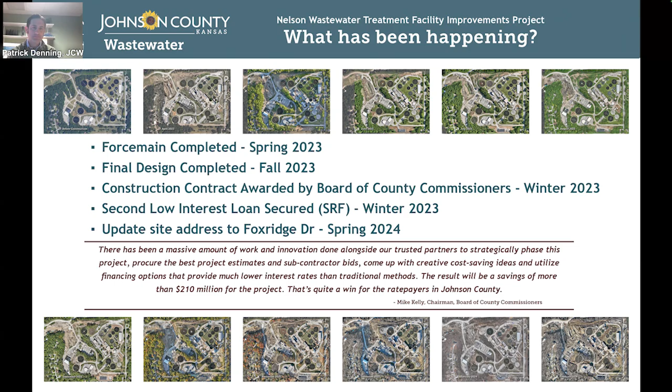A little bit about the project drivers for the project. The first is aging infrastructure. This facility was first placed into service right after the Second World War as the population started to spill out from Kansas City over into Johnson County. So this facility was constructed in the late 1940s. Some of those facilities are actually still in service, and so we have a need to renew that infrastructure, which is 75 years old in some places.

Also, compliance with regulatory requirements. We'll have a new permit coming out from the state that requires lower ammonia and nutrient effluent to be discharged to Turkey Creek. The current technologies at this facility can't meet those limits, so we need to upgrade our infrastructure to meet those current nutrient limits as well. So it's a good time, needing to upgrade for limits as well as aging infrastructure, to do a big project here.

We also have wet weather system capacity that will be upgraded as part of this project. As our system continues to age, we have high flows that come into the plant during wet weather events, and we need to be able to accommodate that as well.

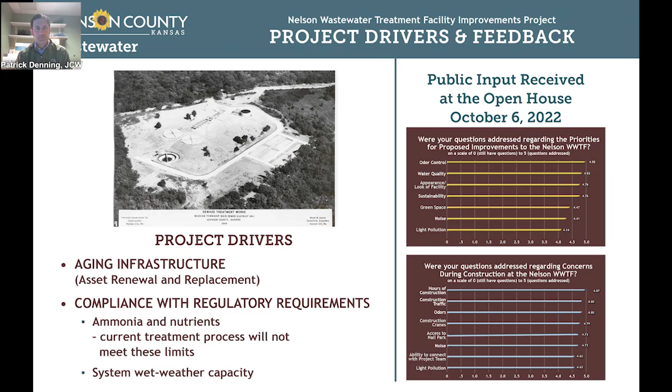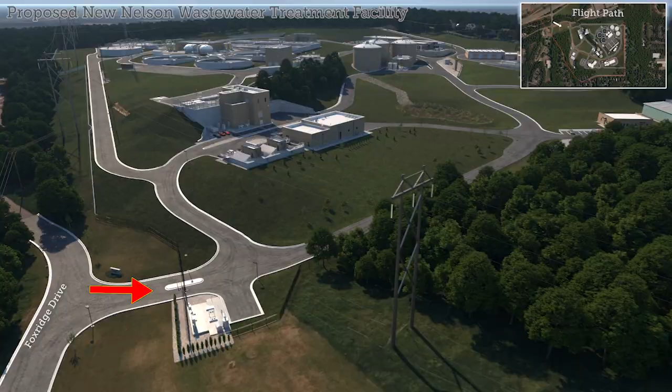I just wanted to start off with a flyover video of the final design. This is looking off of the new entrance along Foxridge Drive, the gates on the lower left, and the main entrance to the plant in a similar location to where it has been historically. As we fly over, we see the hillside and the lower treatment facility.

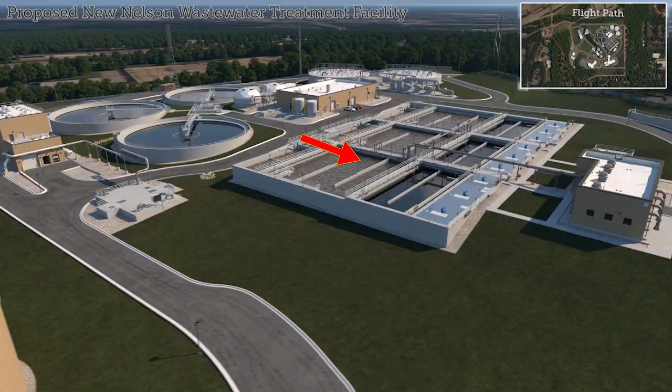We see that we've tried to maximize the green space between the wastewater facilities and the neighborhood to the south. The big tanks there are our digestion complex, and the basins you see here in the rectangles are the biological nutrient removal basins. That's the new technology that will allow us to meet our new permit limits.

The two circles up at the top, now swinging around to the bottom, are the primary clarifiers. Those are odor controlled, that's why they have covers on them. The three final clarifiers you see at the end, that's with the more polished wastewater, which doesn't generate odor, so those are uncovered.

As we go along Nall here, you'll see that we've installed at the end of the project a decorative wrought iron fence. We have constructed, or will construct, a berm there, and we'll place vegetation on that berm as well to serve as a kind of screen to the plant.

The rendering is showing trees as they will look when they're planted, not as when they're mature. So this will be like 2029, say, when the project is complete, but the vegetation is new. We'll also plant grasses to kind of fill in the gaps as the trees mature.

This is now looking along 49th Street, looking north to the facility. And then we will zoom back up. This again shows the buffering of the facility with the administration facilities and green space, to provide a little more distance between the wastewater facilities and the neighborhoods to the south and west.

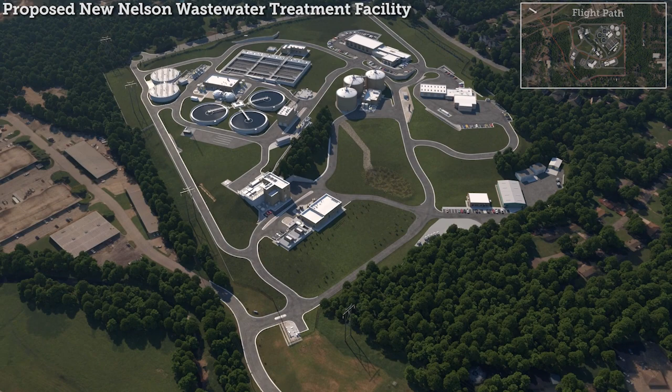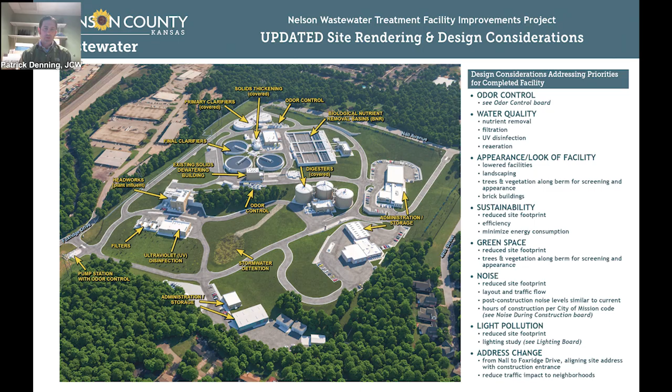So we mentioned some of the design aspects of the facility. Obviously, we're doing this for water quality, but there were a lot of things we wanted to consider when constructing this facility, including an opportunity to be good neighbors in the community. That includes upgrading odor control, upgrading the appearance, the berms, the look of the facility, adding green space, and minimizing noise and light pollution. We'll talk more about that in the coming slides.

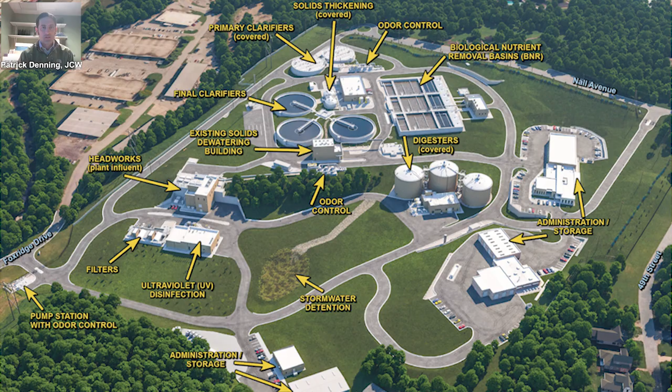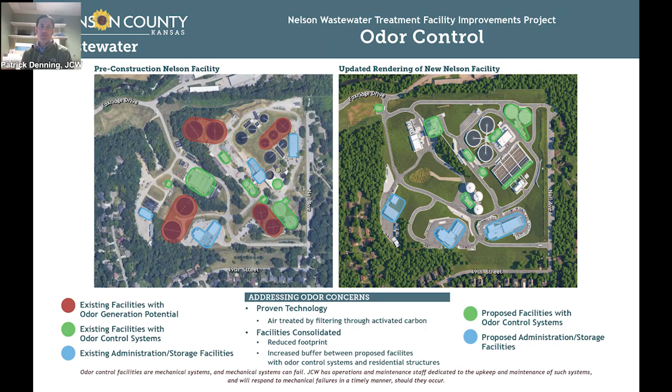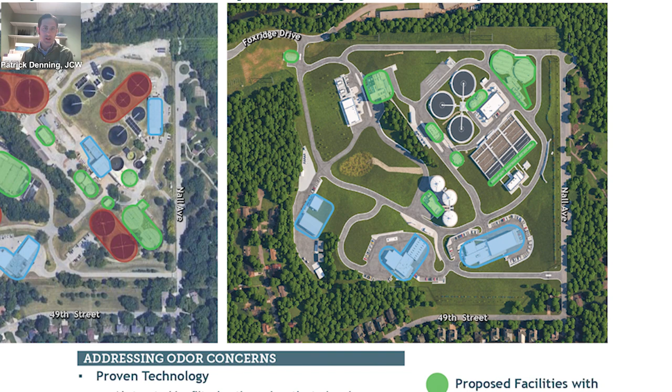The first item we want to talk about is odor control. Historically, the technology employed to treat flow at the facility has relied on trickling filter technology, which has periodically been a source of odor. That will be removed and replaced with the biological nutrient removal basins we saw in the video. Sources of odor will be controlled with new technologies, including granular activated carbon filtration systems at the new facility. We've also consolidated those facilities and buffered the neighborhoods with administration buildings to the south and green space around the facility.

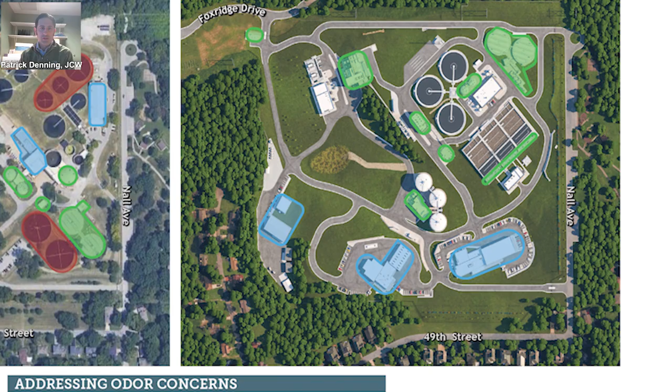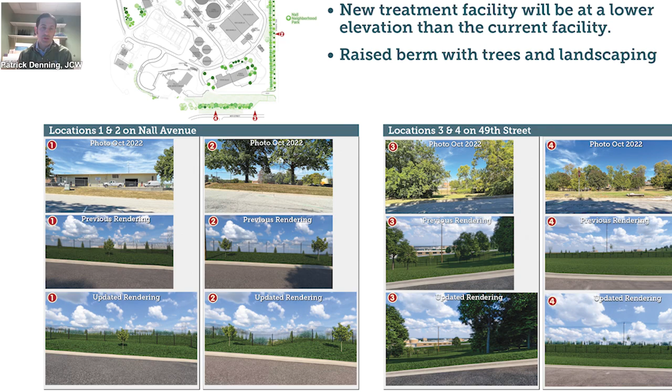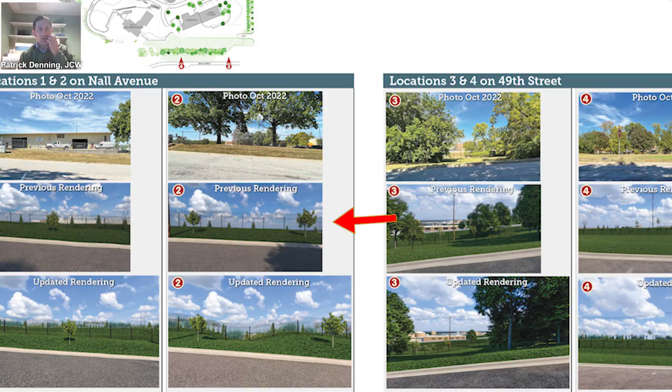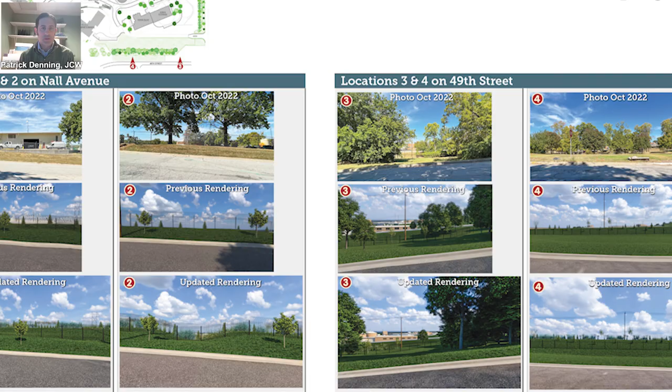As shown in the video, we have berms that we've constructed, or will construct at the conclusion of the project, with vegetation on top. The top photo is the view right now of the facility. The second is the previous renderings shown at earlier public workshops. The last is the rendering as it stands today. The biggest changes are the addition of grasses, and we've raised the berm in some areas based on public feedback.

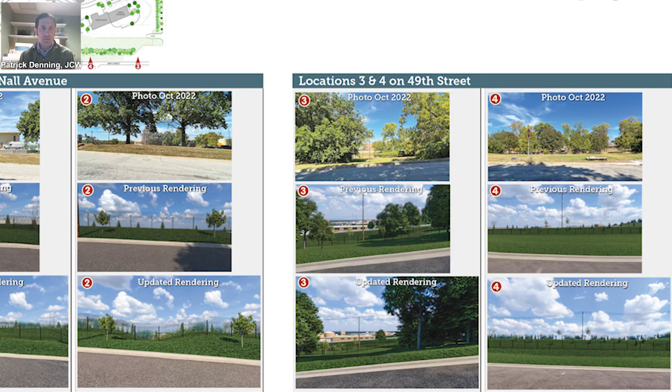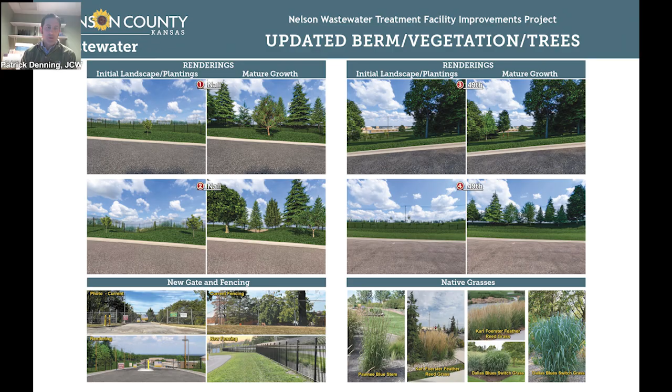There are various photos from different spots along the facility. If you want to pause the video and take a closer look at any of those, feel free to do that now. The next photos show what the site is proposed to look like at the conclusion of the project, and what it will look like once the trees fill in and become more mature.

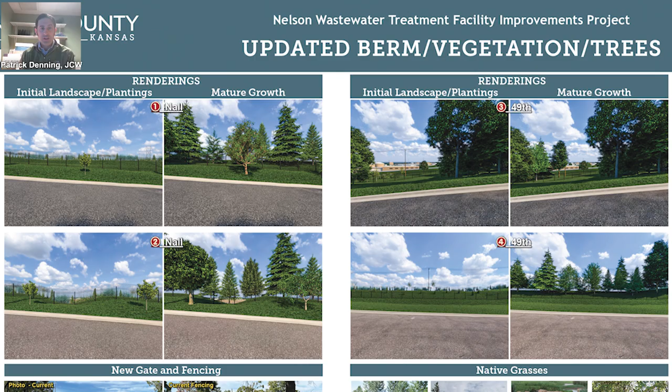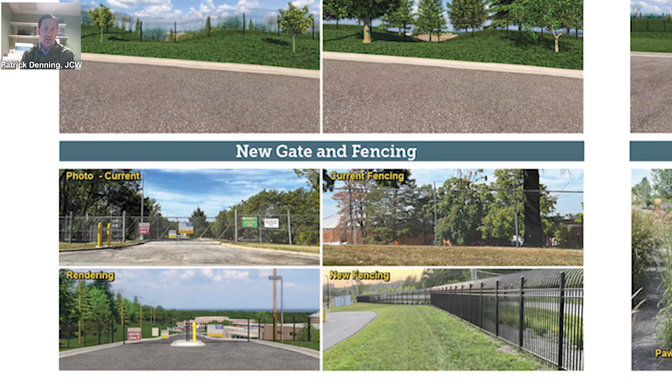As the trees fill in, some of the blank space you see now will be filled. We can't put the trees too close together, otherwise they won't mature. Planting full-size trees doesn't give them a good shot to live, because you have to match what's underground with what's above ground, and their root systems need to grow with the tree. That's why we plant small trees, but over time they'll fill in and screen the site rather well. There will also be new gates and fencing with a wrought iron style fence along Nall and 49th Street, and native grasses planted in the lower right area to supplement the trees as they grow.

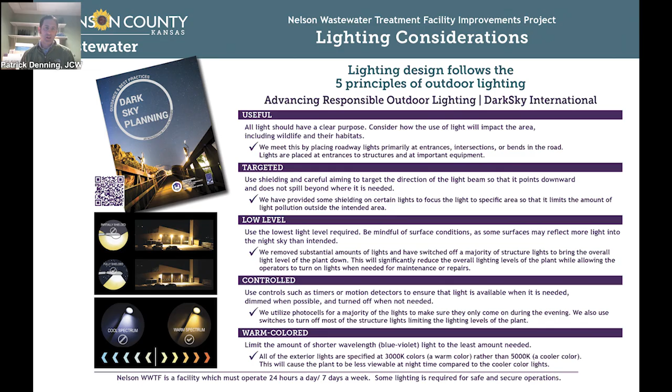For lighting considerations, we're following the City of Mission's guidelines, which include the Dark Sky International guidelines. There are five tenets of the dark skies principle: lighting should be useful, targeted, low level, controlled, and warm colored. We've tried to implement that wherever possible.

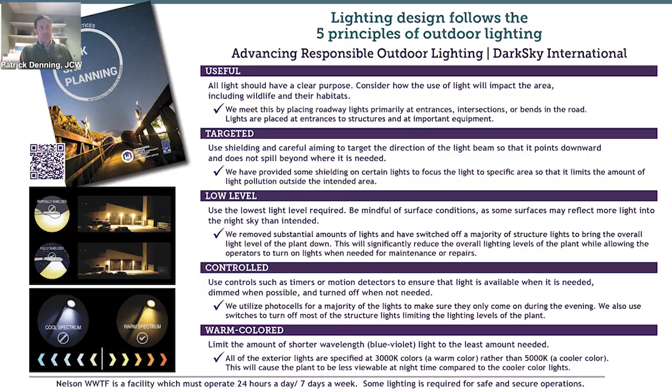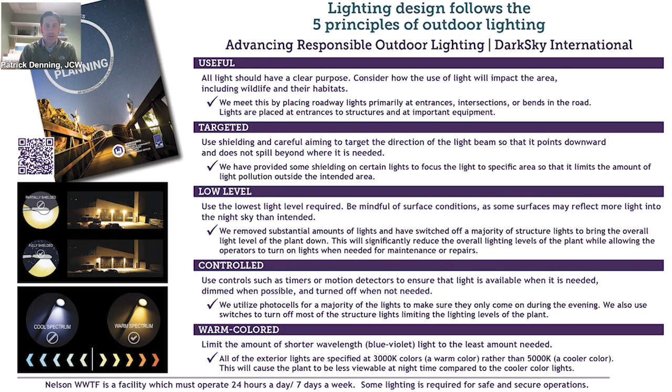However, the facility does operate 24/7. We treat flow every hour of the day, and we've consulted with the Sheriff's Department as well, since this is an important facility for the public good, and some light is required on the site. We've tried to minimize it and disturb the area as little as possible, but there will be some light on the site.

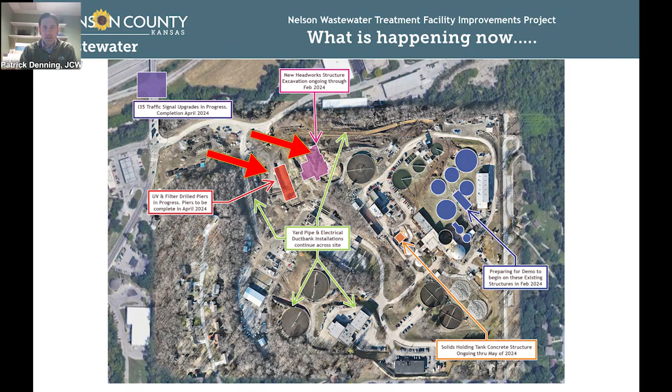So what is happening now? By Foxridge Drive in the top left corner, we're currently doing foundation and excavation work for future buildings: our ultraviolet light disinfection facility, our filtration facility, and our headworks facility. In the middle, we're constructing a solids holding facility, shown in orange. The blue on the right is demolition of some of the old facility so we can build new facilities. We have to do this project in stages as we continue to treat flow while we construct the new facility. Also, over the I-35 and Lamar interchange, there are now traffic signal poles up, and we're awaiting power to bring them online, hopefully in late spring of 2024.

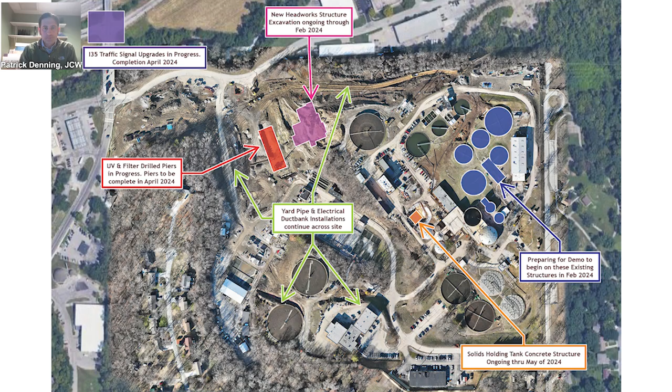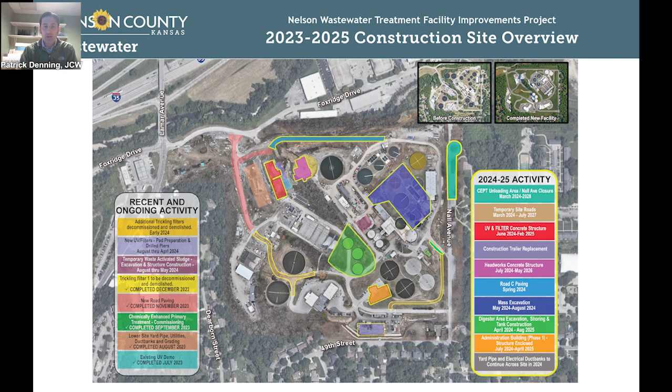Recent and ongoing activity includes construction of some plant roads, demolition as we talked about before, and site preparation and foundations for future facilities. In the coming year of 2024 to 2025, you'll start to see buildings coming out of the ground, as our UV disinfection and filtration facilities begin construction.

The first phase of our administration building will be constructed, shown there in orange. You'll see demolition occurring at the top of the site to make way for the new facility, including demolition and excavation for the digesters, which are precast concrete. The area in the middle, shown with green circles, will start to be leveled for construction of those digesters as well.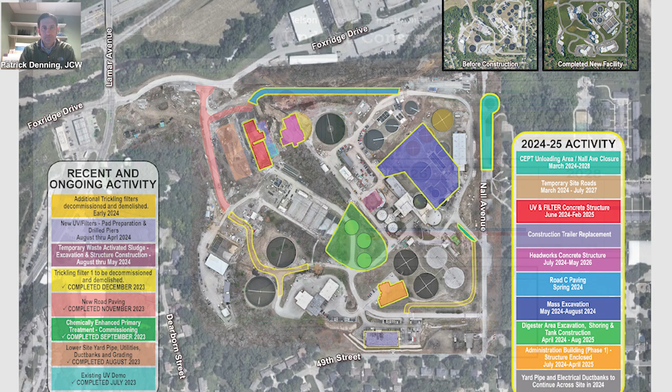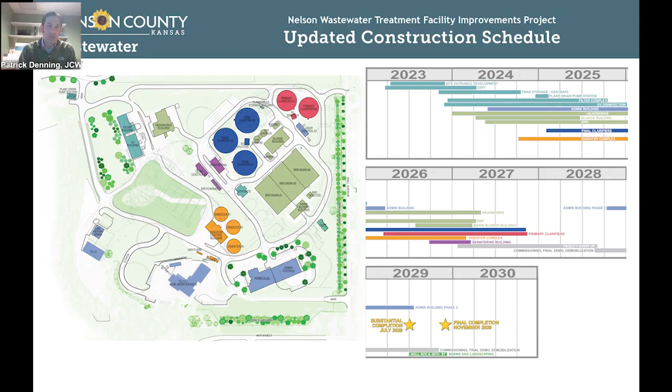This is a long project, primarily because the team has to continue to treat wastewater on site while we construct the new facility. So we can't just demolish the whole site and build from scratch. We have to do this in phases so that we can continue to serve the public and create the new facility. So we're currently in 2024.

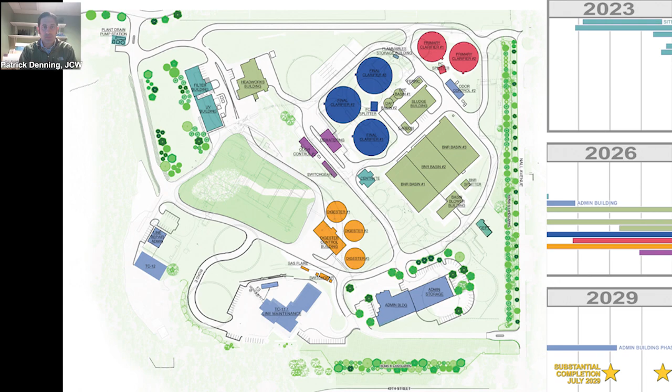Some of those teal type colors are the areas we've talked about before with the UV disinfection and filtration facilities, as well as some of the admin facilities. As you can see, as 2024 moves on and into 2025, there's more and more colored lines, meaning more and more things are being constructed, including the digesters and other things.

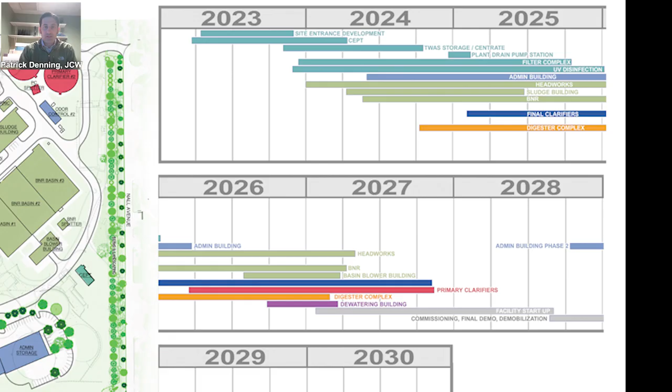This project will continue on through 2027 and into 2028 when we start to put a lot of these facilities into service, with substantial completion expected in the summer of 2029. At the very end of the project is when you'll see the berms and the landscaping come in, and the reason for that is we just can't disturb that vegetation once it's installed, and it's difficult to do that during construction. So we'll be putting up the berms and so forth at the end of the project in late 2029.

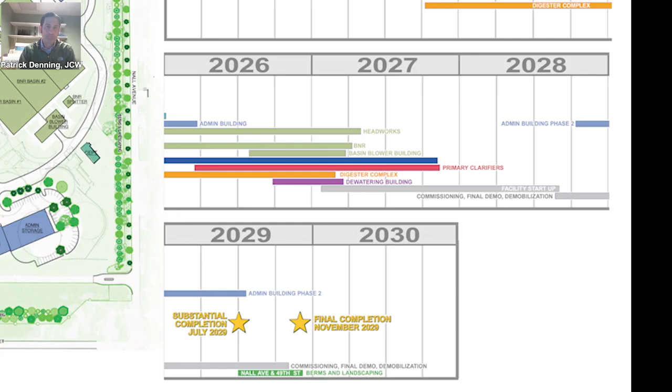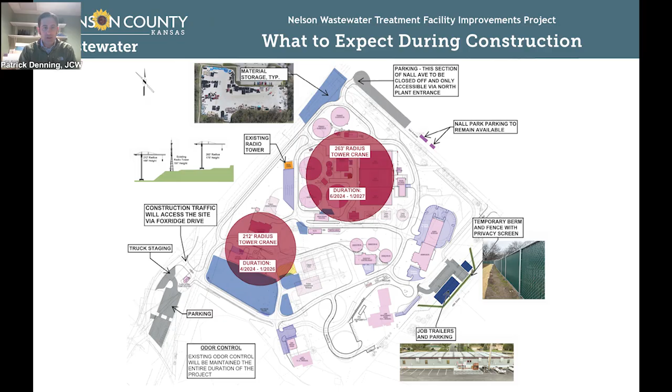So what to expect during construction? Some of these things are already there. There's construction fencing already up. There's a trailer complex that's already been set along 49th Street. The parking is being developed along Foxridge Drive. That's for construction workers to park during construction because we have a very tight site here.

In the spring of 2024, you'll notice there'll be a tower crane installed on the lower end of the site along Foxridge Drive, and that crane will be there until early 2026. Then in the summer of 2024, the tower crane in the middle of the site will go up.

Tower cranes are being installed because they increase the efficiency of construction, since they're not going around in mud and so forth if there's bad weather. But also they're good neighbors actually because they're electric, so they don't create a bunch of pollution, and they're actually pretty quiet because they're running on electricity. So there's a lot of benefits to putting tower cranes up on site. You'll see those come up in 2024.

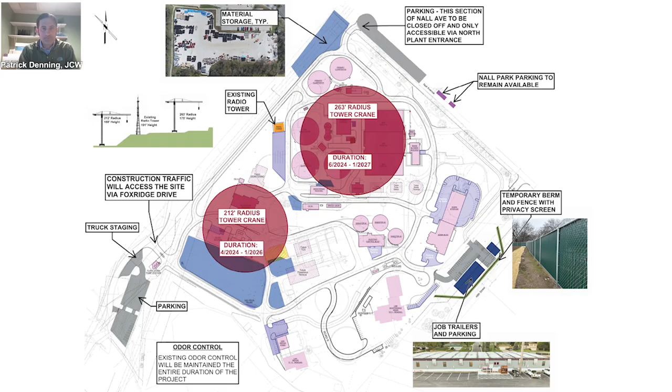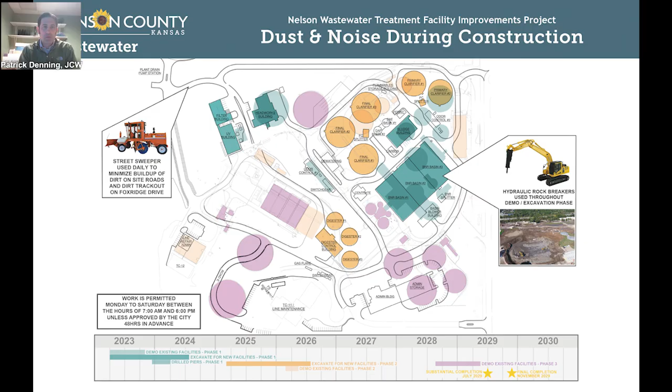So it's a big construction project, and unfortunately, with construction comes dust and noise. There's a lot of areas that have to be excavated. There's a lot of rock on this site that will have to be broken up, and with that comes noise. So the schedule below shows the areas of construction and when the most noise is expected to occur from rock breaking and so forth. There's also some noise from demolition of facilities, but that's fairly short-lived.

In 2023 and 2024, phase one excavation is going on. That's going on right now. In 2025 and 2026, the upper site will be excavated, and then there'll be some demolition at the end of the project, but again, that will be rather short-lived.

For dust and noise control, we are utilizing a water truck to try to water down areas to control dust, and we're also using street sweepers to try to keep the roads clean so that the construction traffic is not tracking debris onto the roadways.

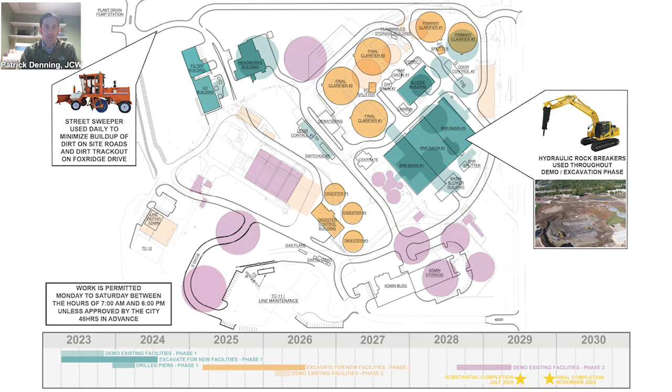The hours of construction are set by the City of Mission. That's Monday through Saturday, generally 7 a.m. to 6 p.m., although Saturdays have reduced hours. And we are trying to abide by them. If we cannot, we are informing the city ahead of time so they can review and approve that if deemed acceptable.

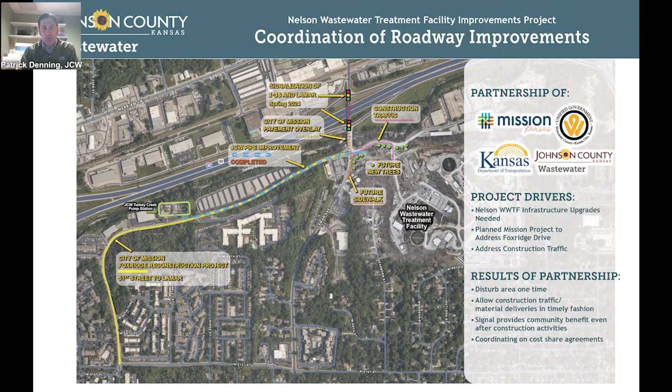As mentioned before, we've coordinated our pipeline project with the City of Mission's roadway improvement project, and we've also coordinated the addition of the stoplights over Lamar on I-35 to accommodate construction traffic, but also just as a general upgrade to the overall traveling public in that area. It's already a congested intersection, so we're trying to do our part to not make it worse and hopefully in the long term make it better for residents.

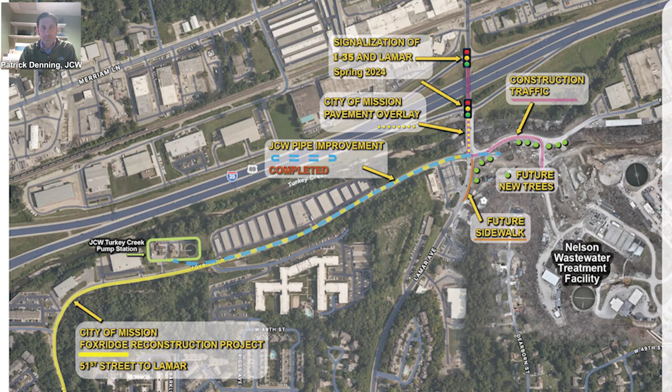We wanted to show this slide at the end because we realize it's a big project. It has a big impact on residents, especially residents near the facility, but this is a good environmental project for the county.

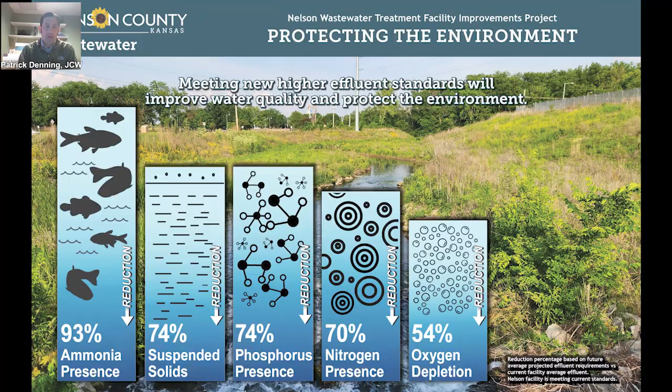Again, this facility serves approximately 100,000 people in Johnson County. At the conclusion of this project, there are going to be significant reductions in ammonia, phosphorus, nitrogen, suspended solids, and oxygen depleting materials compared to the effluent being produced right now. Now, the effluent being produced right now meets our current permit, but with our future permit limits, those will be required to be reduced. So this project will have a significant impact on the effluent that we're putting out, which ultimately will impact the health of Turkey Creek, the Kansas River, which flows to the Missouri River, Mississippi River, and the Gulf of Mexico. So the environmental component to this project is significant, and it's important to remember why we're doing what we're doing and why we're going through such a large effort.